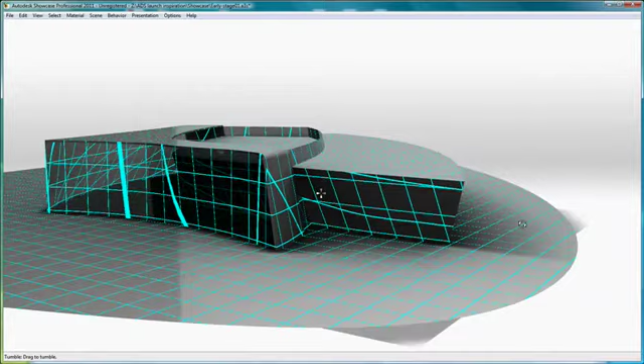You can load your AutoCAD DWG data directly in Showcase 2011 to create real-time interactive presentations. Showcase helps you evaluate design variations and accurately convey real-world materials, lighting, and environments. You can add lighting based on the site by simply using a panorama as environment, helping your customers and colleagues experience the building before it's real.

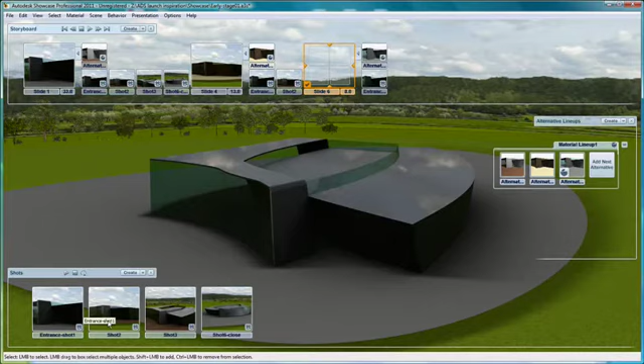Easy-to-use storyboarding and presentation tools enable you to vividly tell a design story through imagery and effects. Stakeholders can explore and interact with digital models in real time.

After you validate your design and communicate your intention to key stakeholders, you can move back to AutoCAD, make the appropriate adjustments, and continue on with your design concept.

As I move forward with the pavilion design, I want to explore ideas for solar protection on the side of the building. I'll design louvers that follow the contour of the curtain wall.

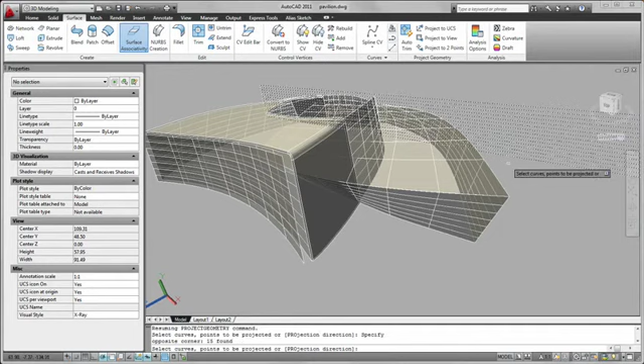First, I'll create an offset surface for the wall, and then I'll project a set of horizontal lines onto the offset surface, creating splines. Now I can use the splines as paths to guide the rectangular profiles of the louvers.

I can create a rectangle anywhere in the drawing and then sweep it along the spline paths. AutoCAD 2011 will automatically align and center the profile on the path, or I can select a specific base point.

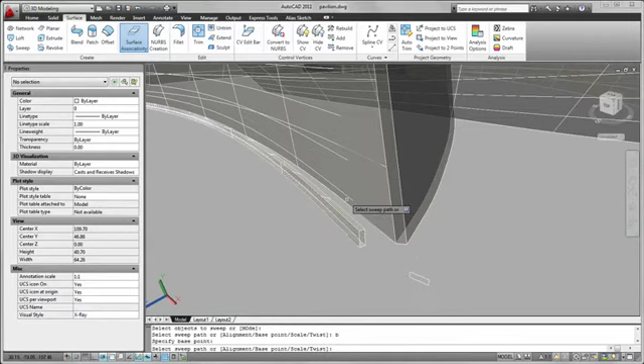Since this is an associative surface, I have the flexibility to modify sweep properties such as the scale, twist, or profile rotation, even after the surface has been created.

At this point, I have a concept for solar protection, but the only way to validate and adjust this design to meet my intention is to send this data to 3ds Max Design 2011, where I can perform an accurate daylight analysis and measure the light intensity.

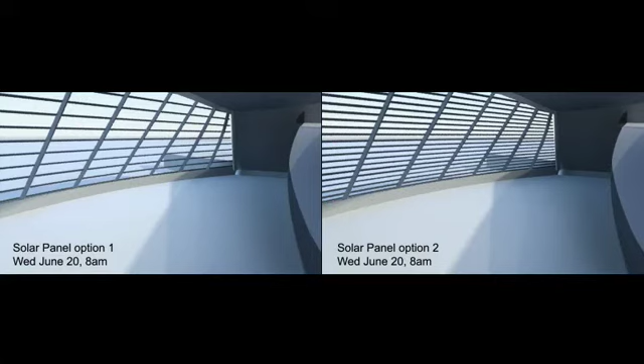The AutoCAD Design Suite Premium 2011 gives you leading 3D design visualization tools that help you gain a deeper understanding of a project before it's real.

You can see how the design works and uncover areas where problems exist. The earlier in the design process this type of review is done, the easier issues can be resolved.

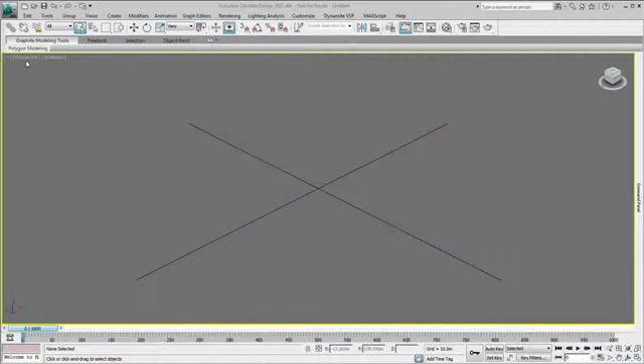Using the File Link workflow, I can link the drawing and retain a permanent reference back to the AutoCAD DWG file, enabling me to update a visualization model after a design change occurs.

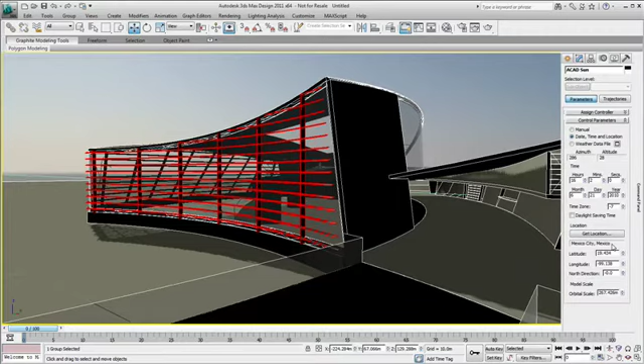This intelligent handling of data helps minimize rework of visualizations when original designs are revised and refined, supporting non-linear decision-making processes and facilitating collaborative, iterative workflows.

I'll move inside the pavilion, where I will perform an accurate daylight analysis using the software's exposure technology. Exposure helps to simulate and analyze sun, sky, and artificial lighting accurately.

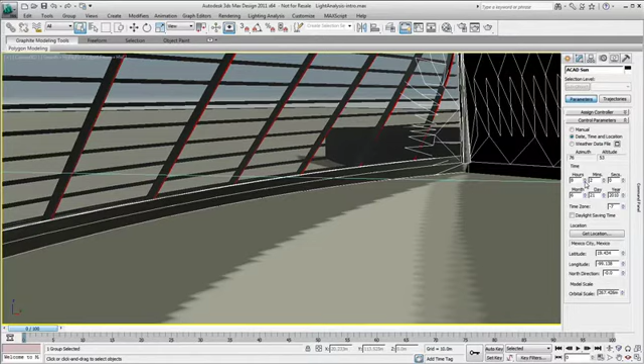Exposure has been validated by the National Research Council, Canada's leading organization for scientific research. With 3ds Max Design 2011, you can visualize how light will interact with your building.

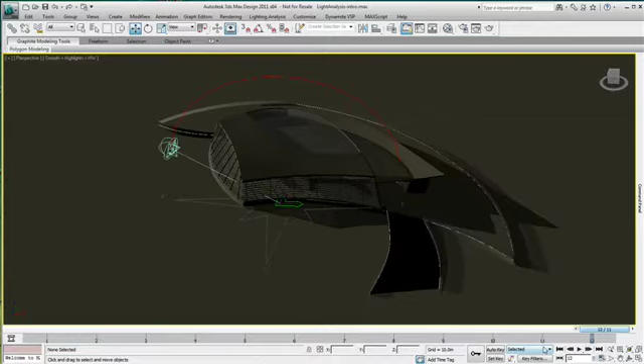The ability to measure light intensities in designs may also facilitate the evaluation of indoor environmental quality for LEED EQ 8.1 certification. In addition, 3ds Max Design 2011 is capable of loading an Energy Plus weather file, allowing me to automatically generate a time series of high dynamic range images and illuminances under multiple sky conditions.

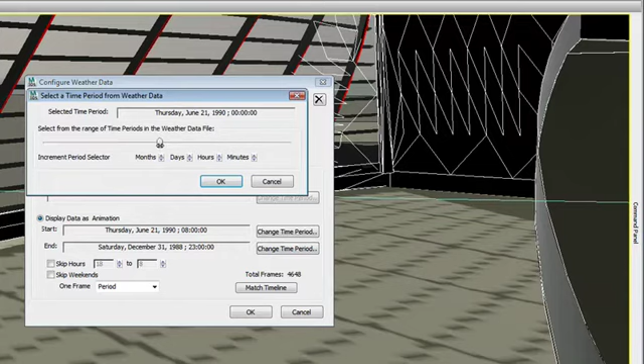The Configure Weather Data window allows me to easily create a sun animation to cover a certain time frame, such as summer solstice, June 21st, from 8 a.m. to 6 p.m. In the viewport, I have direct feedback on the light entering the pavilion at a certain time of day.

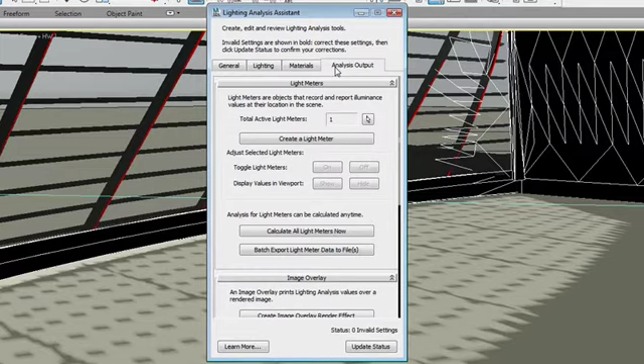With the help of Lighting Analysis Assistant, I can quickly ensure that my scene is ready for light calculation. I can then create a light meter to report the light level and calculate the foot candle amount entering the pavilion at a certain time of the day.

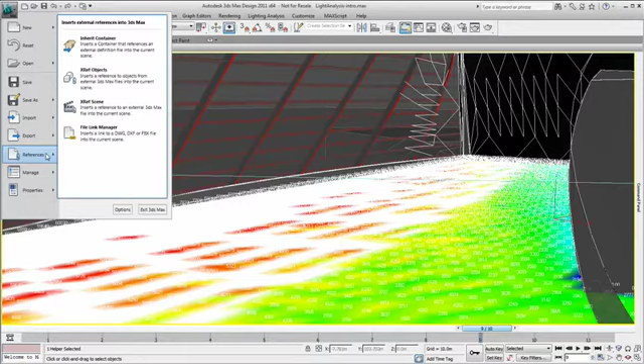The result can also be saved to a CSV file for further analysis. Light meter calculations are almost instantly generated, allowing for quick iteration and validation between AutoCAD 2011 and 3ds Max Design 2011.

I'll load a different version of the DWG data with a design variation of the louvers, and then I'll rerun the light calculation to see if the results more closely match the design intent.

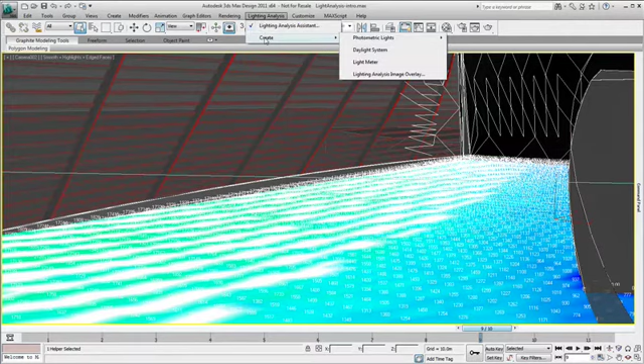With the strength of file linking, allowing direct data exchange, and the speed of light calculation results, 3ds Max Design 2011 software provides a powerful, integrated toolset that helps you iterate on design concepts.

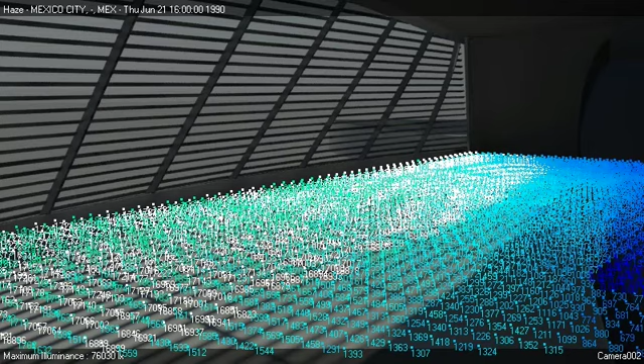For presentation purposes, it can be useful to overlay light levels on top of the rendered image. This helps put the results in context. Here are two different rendering results of the light level calculation for the pavilion. I can easily use these images for a technical presentation.